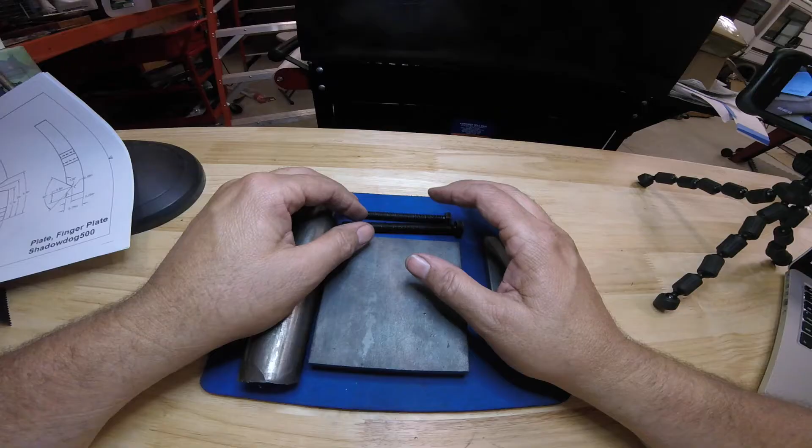This first video will contain a description of what I plan to make, and it will be followed by a second video that shows the completed project as well as the work that went into making the tool.

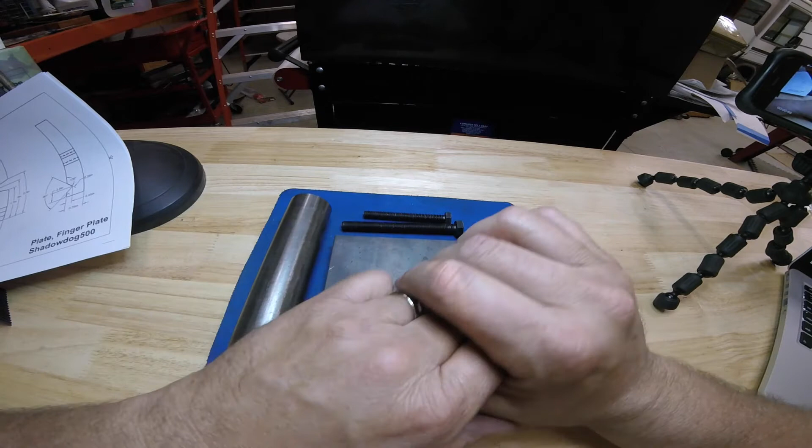This year I'm making a finger plate. Finger plate's a good tool for holding small items when working in a drill press or belt sander, and it's not only a good tool, it's an important tool. I know somebody personally that was holding a small item while drilling and it got away from him, and he wound up in the emergency room and doesn't have full use of his fingers anymore.

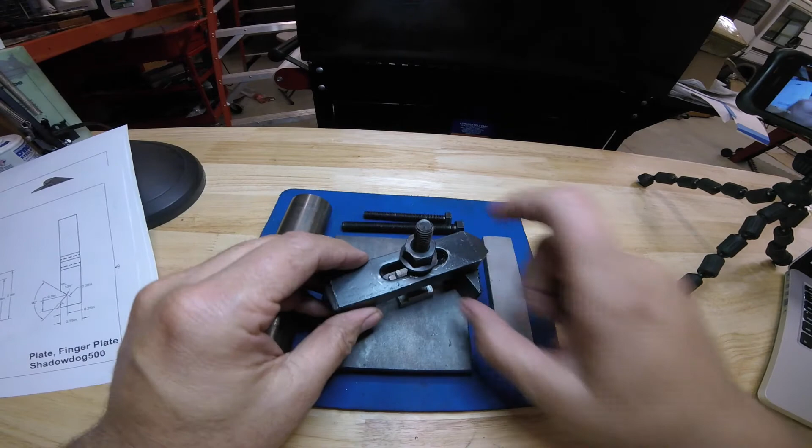So this is a good thing to have. When I work on the drill press, I actually made T-nuts that fit it, and I use the hold down kit from my mill. That's something I normally do because I think of Rich and his fingers.

There are plenty of designs out there for finger plates, and there's even an excellent video by ClickSpring who made a beautiful looking one. The thing looked like artwork.

Me personally, I'm one of those people that Emma pointed out last week is pushing beyond their experience level with this. I don't normally sit around and try to make really nice looking tools. If you watch my videos, I'm usually fixing stuff in the shop here.

When I run into a problem, my lathe and mill are the get-me-unstuck tools. Usually I'll go over to the whiteboard, think what I need, draw something real quick, and bang out something really simple. I don't care if it looks pretty, and it'll get me unstuck. It's usually a really simple tool to get me unstuck. I don't usually do stuff like this.

The only time I've done something like this before was the year before last, for the 2015 What's in Your Box, Keith Fenner's What's in Your Box giveaway. To be quite honest, this will also be my tool donation for the 2017 What's in Your Box giveaway, and some worthy recipient will get this tool when it's all done. So when this is done, it gets shipped off to Keith.

This project was also my first real design in Fusion 360. It's a program that's free for hobbyists, not free in general, but if you're a hobbyist they'll let you use it for free. The thing I like about it is I can do the designs, and I also can do the drawings. So this is going to be the actual finger plate itself.

I did a simple design: just a V here for holding the round stock, a notch here for drilling, and then just a center hole. That's really what it is.

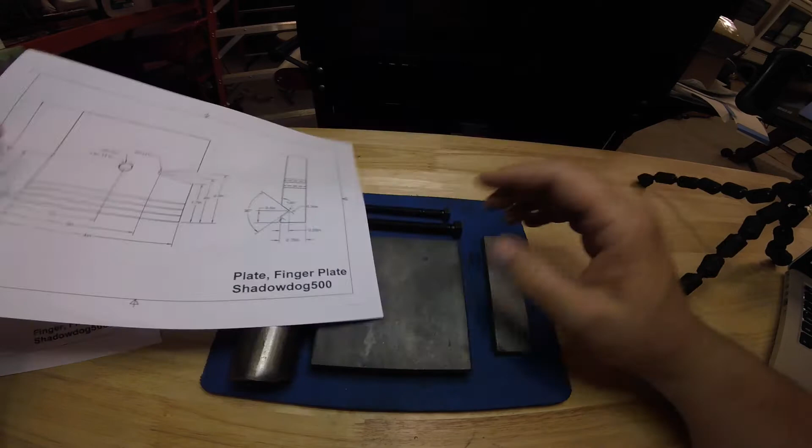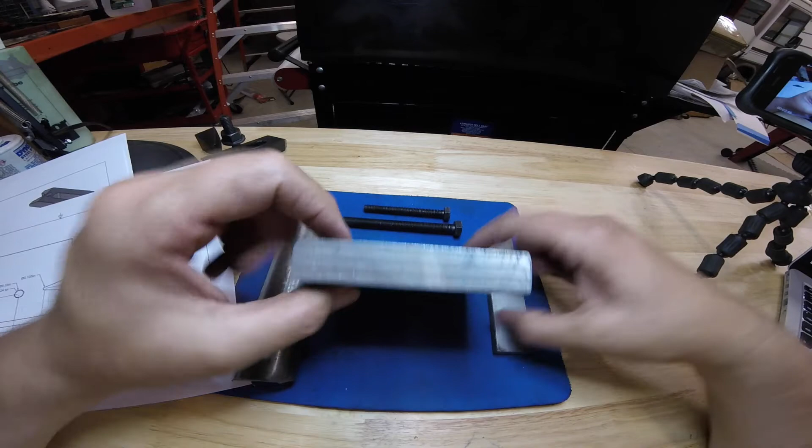I made this 4x4, but actually looking at the 4-inch steel I bought to make this from, it's 4 inches on the outside from the protrusion when they rolled it. So what I'm going to have to do is mill this side and this side until I get it flat, measure that, and whatever that measures will be the same dimension here. So instead of 4x4, it's going to be 3.9 something probably, and it'll still be square, the hole will still be in the center, and the rest will be proportionally the same.

The next thing I was going to be making after that will be the most complicated thing I've ever milled, or going to mill. I was going to make it out of this piece of metal here that I've already bead blasted to get the mill scale off.

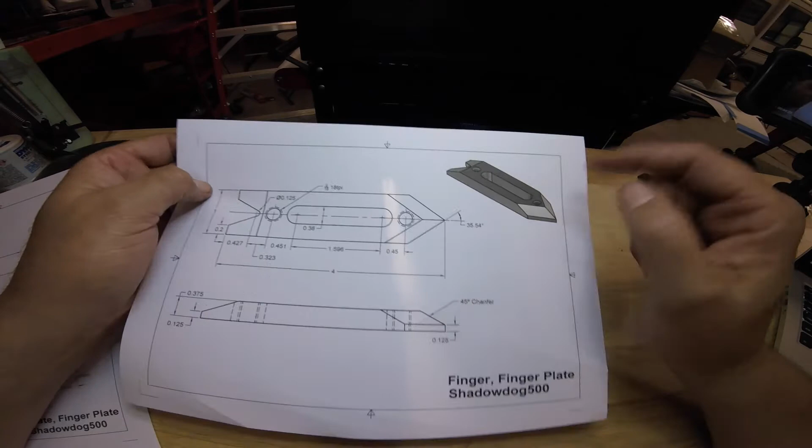This has a couple chamfers on it. It has this angle here, which I'm thinking about how I'm going to do — I'm probably going to use a stop or something so it winds up in the center. I didn't do anything fancy, because some designs you see are real fancy. I just did this with a notch and a bevel. That's going to be pushing my level a little bit, but I think it'll look nice when it's done. We'll see.

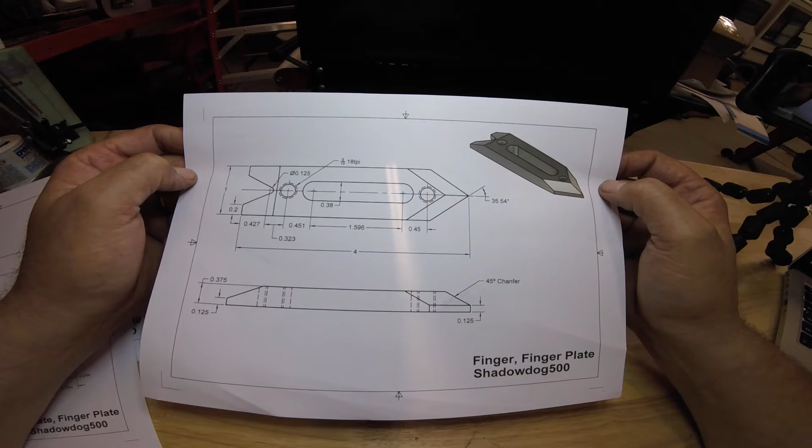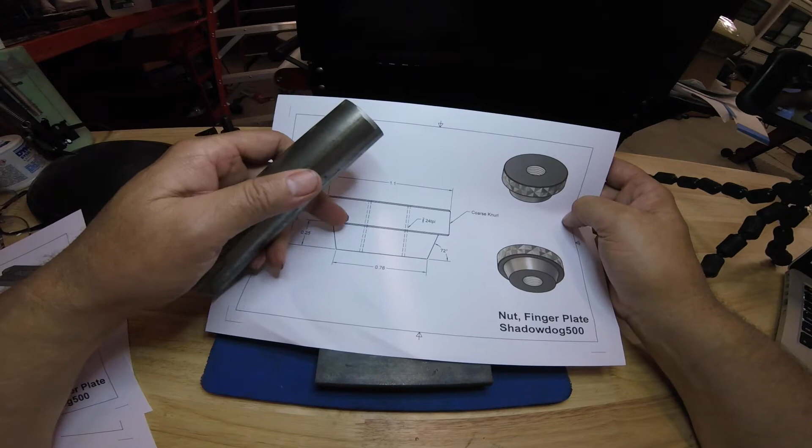The third thing I was going to be doing is making the nut for it. This is lathe work, which I'm more experienced with — I've had a lathe a lot longer than a mill. So I was just going to make it, knurl it, and make it to these dimensions. These dimensions are a little bit odd, like 1.1. Why would I do that?

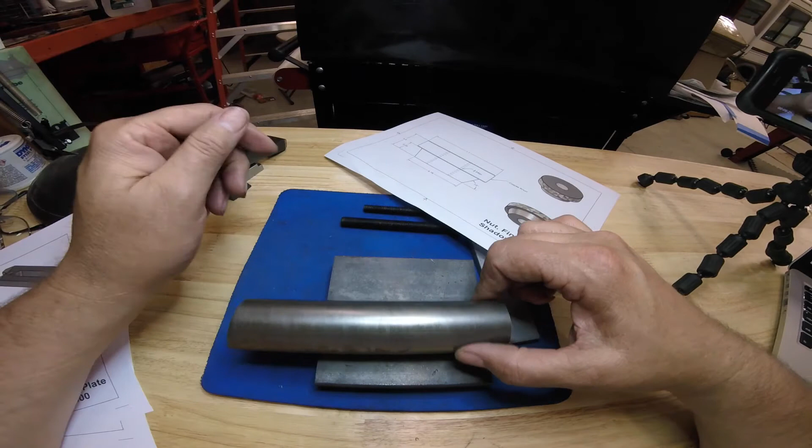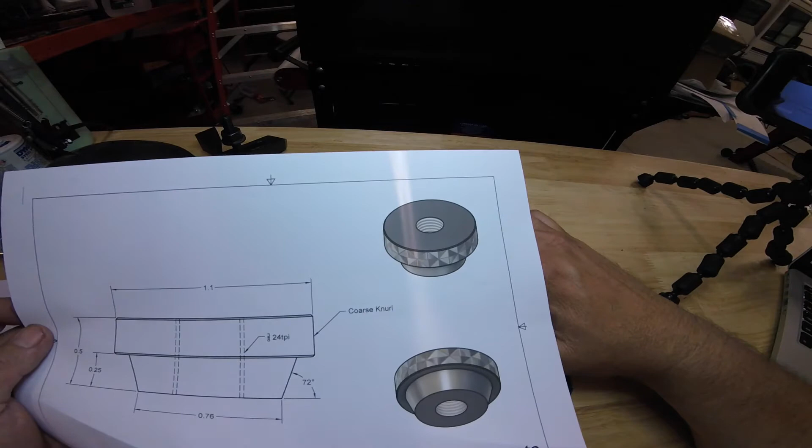Actually, it's kind of interesting. This is my first real thing I'm making out of Fusion 360 that's a little more complicated than that press I made for the U-joints. This is the first time I actually took all these parts, put them in one drawing, and assembled them. I'm not up to the level of John Saunders, who made calipers that actually moved, but I did find out how to put it all in one drawing and put it together. It was nice because I saw the proportions were all wrong - I made this way too small, so I monkeyed with it until it looked nice in the drawing, and that's why these measurements are what they are. I'll make them to that, since this is 1 1/4. So I was pushing my experience level with that as well.

I ordered some grade 5 hardware from Fastenal for the center, and I'm probably going to cut it and use it as a stud, because when I was messing around in the drawing putting all the components together, it was way too long and wouldn't look nice. So when I put it together, I'm going to figure out where it looks nice and cut it to use as a stud.

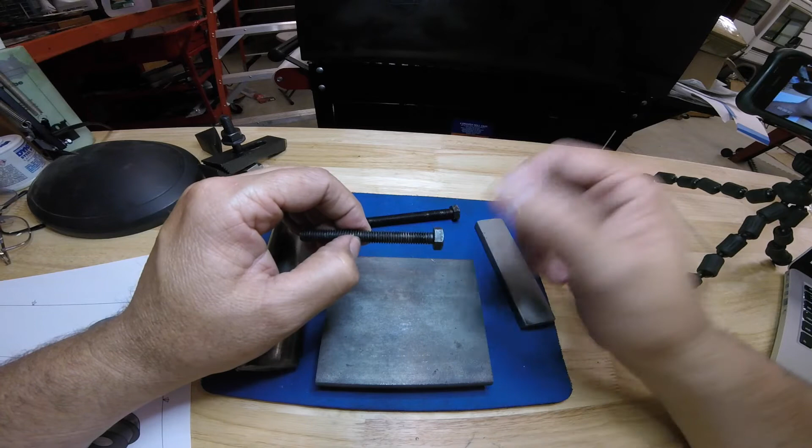This is what I have for the jack screw in the back. I was messing around in Fusion 360 and found last night that you can click on a tab, look through the McMaster-Carr catalog, and I found a knurled thumb screw that would be ideal for this. I clicked a little image button and it ported it right into my drawing, which is incredible. Then when I saw it fit, I went up to the tab and said buy it, and it shows up Tuesday. That was very smart by McMaster-Carr, because I wasn't even thinking of them. So I have a thumb screw coming, but I'm going to use this till that gets here.

But anyway, this is what I was doing, and then I was going to show you the 3D model that I made in Fusion now.

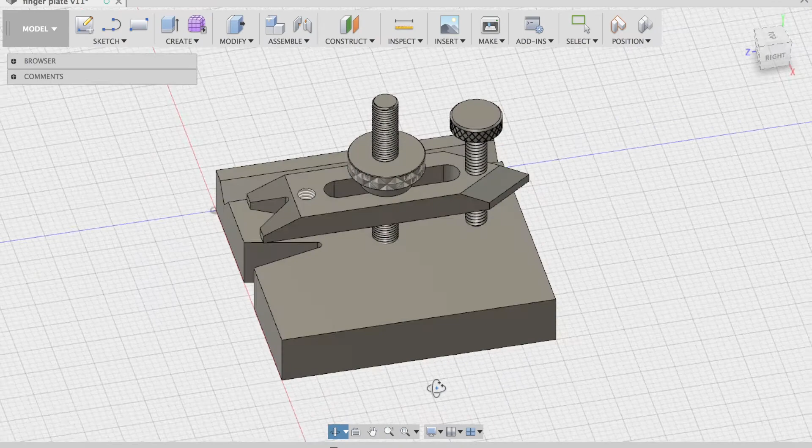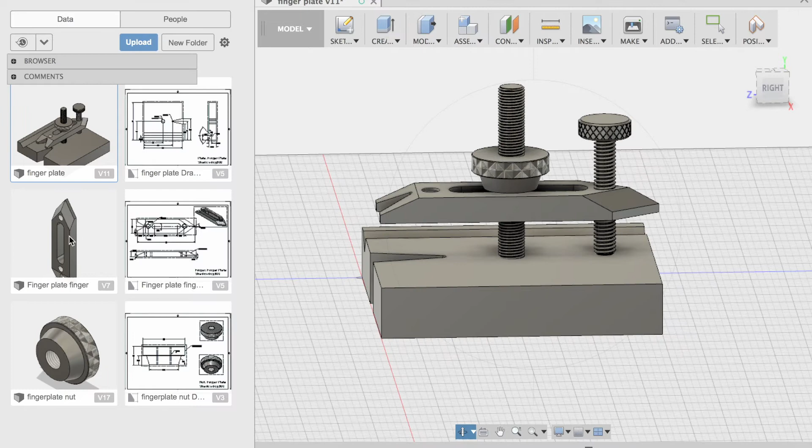Here's the finger plate that I plan on making. I really hope it turns out as good as this drawing, this assembly. This is the first time I've ever assembled anything in Fusion 360, and I'm not as good as John Saunders, where he could make these things screw up and down. I just literally took the components, put them together, set them in place, and that gave me a chance to look at the perspective of how things look, which came in handy for getting the scale right and seeing how the parts relate to each other. Here's all the parts right here, and I just literally put them into one drawing.

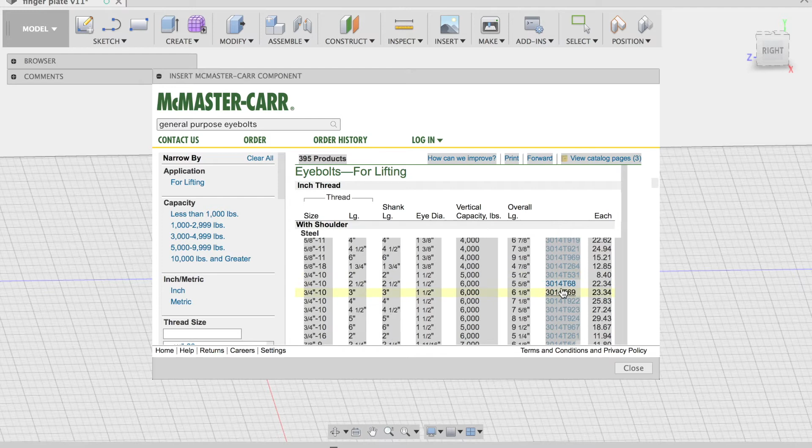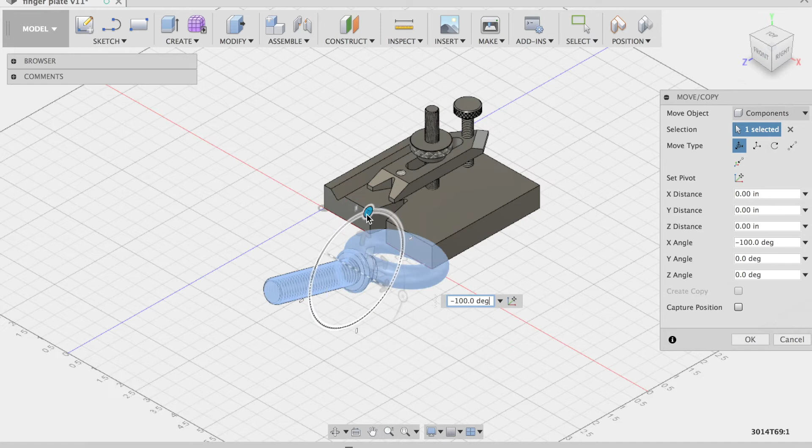The other thing, as I pointed out before, is this thumb screw - that's something I just found out. You can go to insert for the McMaster-Carr catalog and say if you want an eye bolt. Let's take this one - you go down and pick an eye bolt you like, click on product detail, go down here, 3D step save, and you just wait a few seconds and it'll import that part right into your drawing. You can move it around, rotate it, put it like this, do whatever you want. You're done, hit enter, and there you go - you have a part in your assembly.

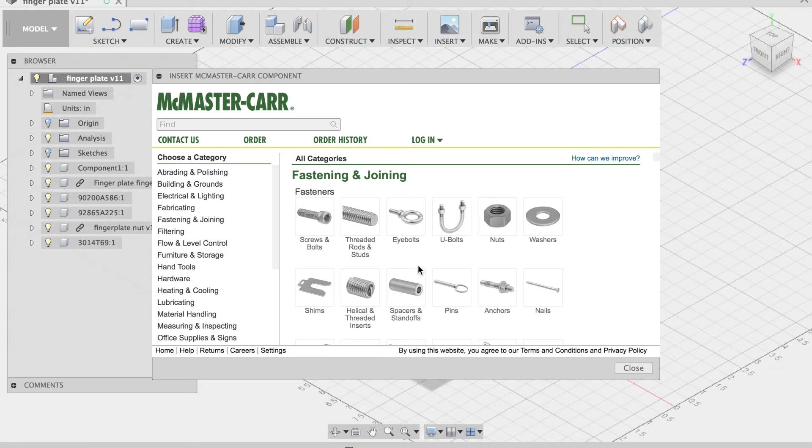The other nice thing is if you go in here, I can toggle that on and off - that's the part number. So you can go back up into the McMaster-Carr thing and actually order that part. Once you finish an assembly, you can order all the parts you put in it. Now I don't need this, so I'm just going to delete it. But that's a nice thing to know, and that's where I got that thumb screw. Just by doing that, I searched through the inventory and found something that would work, and it worked.

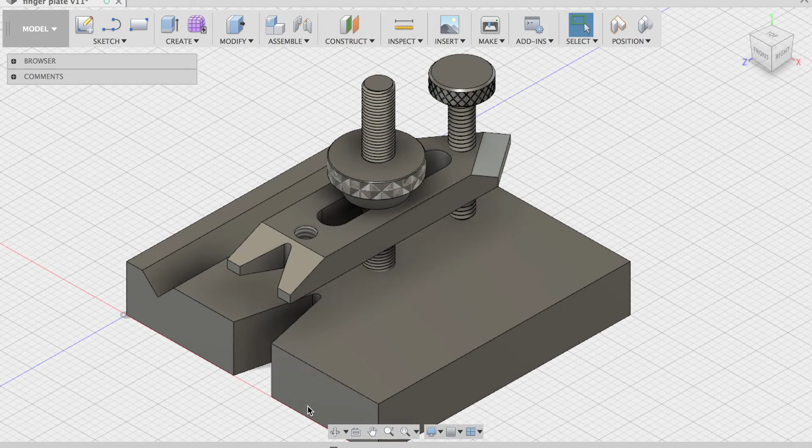The other thing, which I did with this for the first time - let me get this in a good position - is inspect. What I did was I went to inspect, did a section analysis, brought it in here to 2 inches, and then I just took a look at it. That's a neat thing to be able to do.

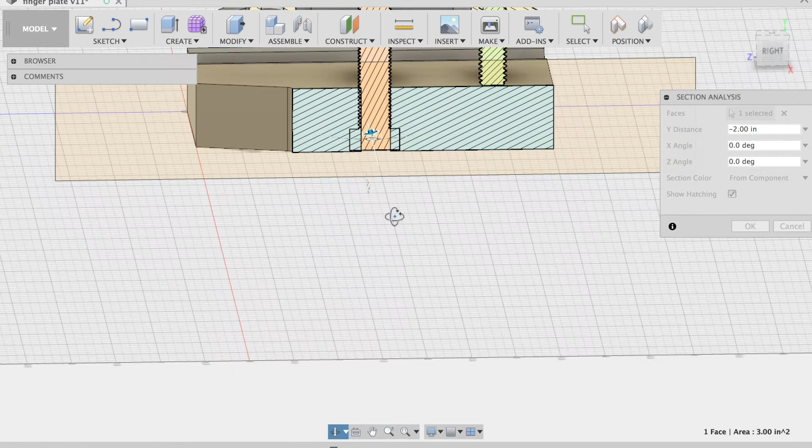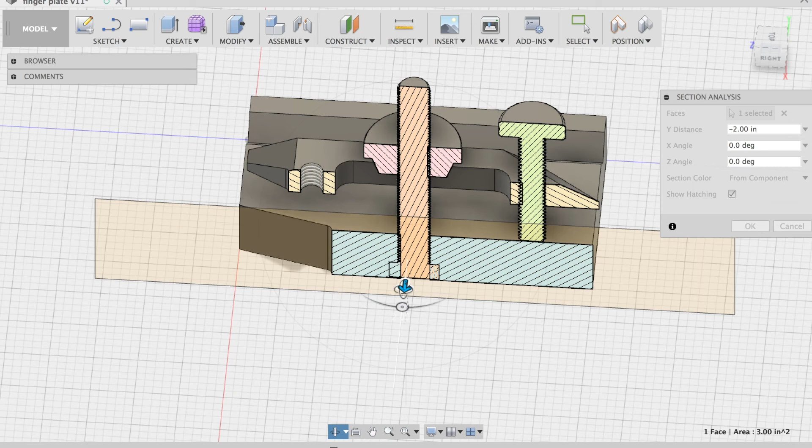This will be even better when I get proficient at this. Originally I had the proportions on this all different, and there really wasn't much space here. I looked at that and said, that's not going to be very strong. So based on being able to use this, I shifted these slots in to give me a little more space, centered this hole to get these the same, and made this the same. That way it's a little stronger at this end, which I thought was really neat. Learning to use this is a pretty good tool.

Well anyway, I really hope it comes out this nice when I'm done. Okay, well, let's get into making it. Thank you for watching. Bye.